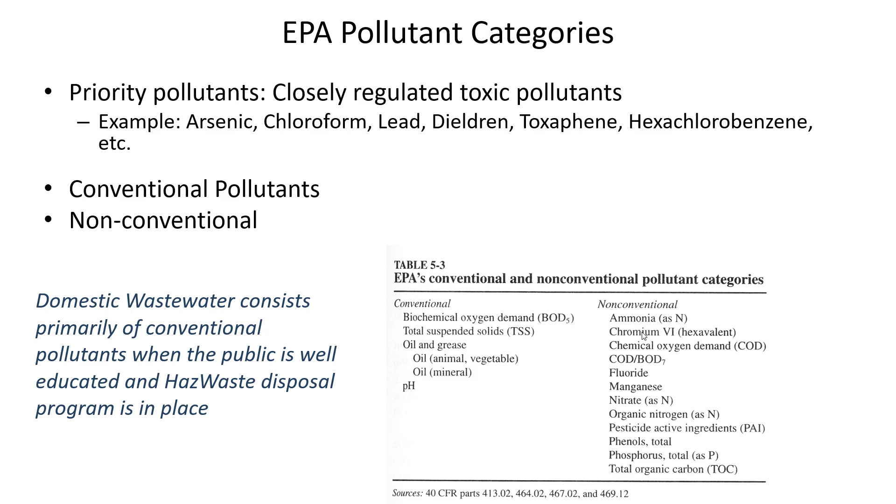And then non-conventional pollutants can be adjusted in wastewater treatment, but it's kind of a rare thing when we're focusing specifically on the removal of these. The exception being nutrients. Nutrients are becoming more commonly removed by wastewater treatment plants, but things like fluoride wouldn't typically be addressed at a wastewater treatment plant. Things like chromium would be very difficult to remove at a wastewater treatment plant. But there's a differentiation between what's considered conventional pollutants and non-conventional pollutants.

So regulations are just a really important tool in preventing those toxic pollutants from coming in and harming our bacteria in the treatment plant, and then getting through the treatment plant and harming the aquatic species that live in waters downstream. And also, we consume the river water, and so if dieldrin or chromium gets into the Ohio River, then that's going to affect the next community downstream.

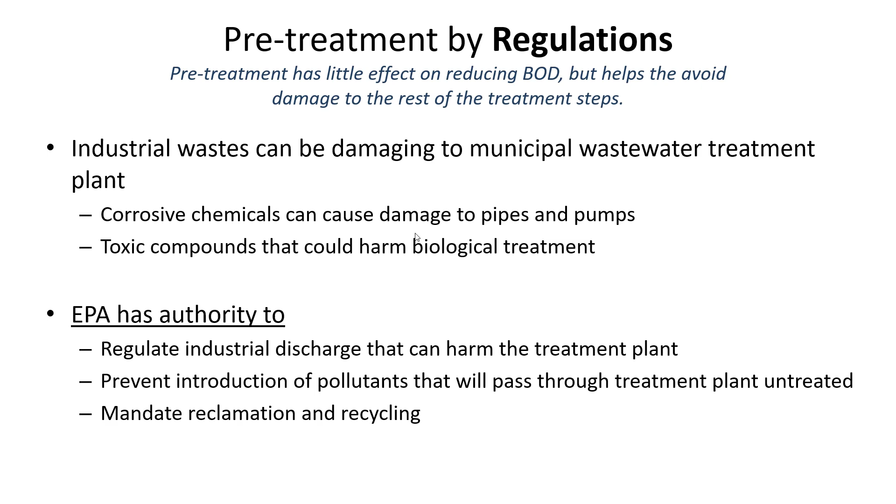So the corrosive chemicals are bad for the environment. They're often bad for the materials in the treatment plant. They can be corrosive to pipes. They can cause damage to pumps, and so we just prefer to get them out of there. And so the EPA has legislative authority that allows it to regulate industrial discharges that are thought to be harmful. And rather than regulating them one by one, and having an ever-growing list of things that you're not allowed to put into a treatment plant, they generally regulate them by categories instead.

And so here's a list of categories of things which are limited in industrial discharges. Both gasoline and diesel fuel can't be discharged to a sanitary sewer because they are capable of causing a fire or an explosion. But that would also extend to things like HMX, which is an explosive, or TNT. There isn't a long list of things that would cause fire or explosion. It's just sort of taken as a given that if you're in the business of producing those chemicals, you'd be aware of the risk of putting it into a sewer.

And so this is just a list of things which, because of the effect, would be prevented from discharge to a collection system. So if you look at some of these things, obviously solid or viscous pollutants that would obstruct flow. So even though gelatin wouldn't necessarily be toxic, it wouldn't be dangerous from a human health standpoint, or even from the standpoint of interfering with the treatment plant necessarily, a heavy gelatin or just flour put into the sewer could congeal, could block the flow, and could limit the capacity of the pipes.

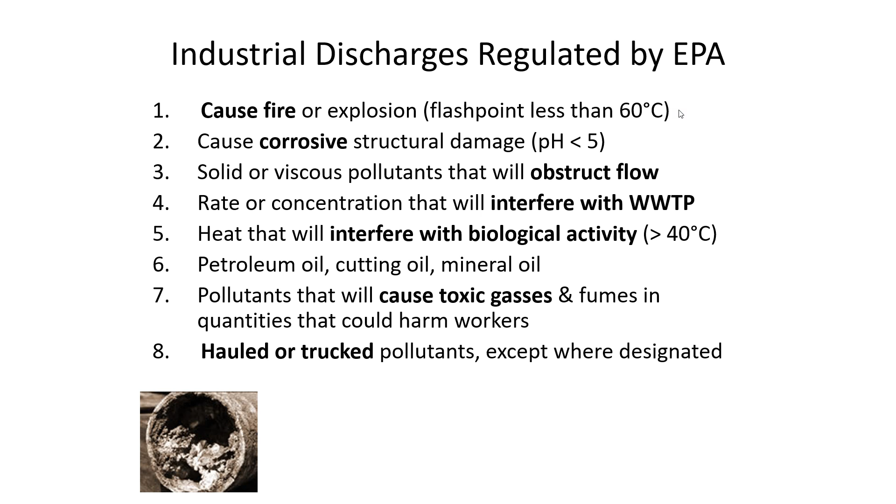And so that's the sort of thinking behind each one of these rows: there is some negative side effect that we're trying to prevent by limiting discharges, and that's why the EPA regulates them. So it's partly about putting laws in place and working with big-time polluters and likely culprits for industrial discharges, but it's also about public awareness. And there's a growing sense that just making people aware of the fact that stormwater and wastewater go to the river is going to help people be more careful about the sorts of things that they pour down the drain.

So pre-treatment is not actually treatment. It's just policies and educational programs that try and bring awareness to the need to avoid putting things down the drain.

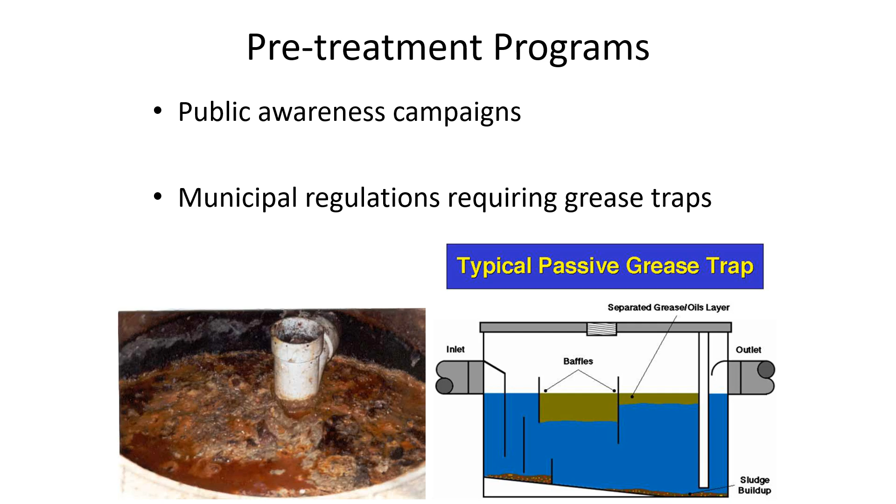And so they'll take grease, filter it, and then they will sometimes have to go through a chemical reaction to precipitate out some of the heavy chains that would cause the liquid to be too solid at low temperatures. There are a handful of cars that have been modified to run directly on vegetable oil without any further treatment. They have to heat up the fuel before it goes to the engine.

But grease is a resource. In fact, most of our wastes have in some way the capability of being considered a resource. If we're able to extract the phosphorus and nitrogen from wastewater, then those could be used as fertilizers. If we're able to apply the organic material from wastewater onto the land, then that can be a fertilizer as well. The organic material can help to improve the quality of soil potentially if it's not containing heavy metals and so on.

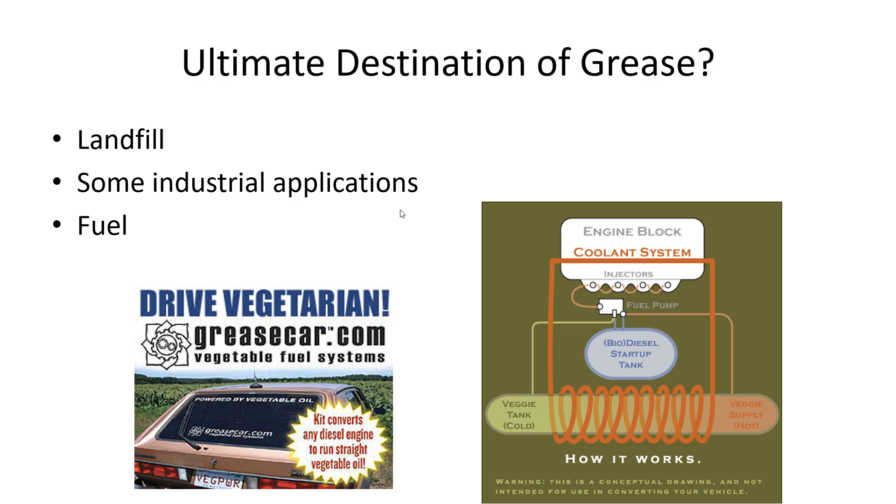So this is just another illustration of how if you are bringing awareness to the need to keep grease and oil out of the wastewater treatment plant, then maybe people are going to be more prone to recycling it and trying to find a helpful application for it.

Of course, there are some people who aren't connected to the sewer at all. They have a septic tank at home. I've got a septic tank. How many of you have septic rather than being connected? Maybe some people don't even know in a lot of cases. But if you live in a rural area, chances are good that you've got a septic tank rather than being connected to a pipe network, because it's not economically viable sometimes to put in a pipe when houses are really spaced far apart.

And I live in a place where most of the houses in the area have 2 acres, maybe up to 30 or 40 acres in some cases. And it's expensive to put a pipe in the ground. And if they're only going to be getting $20 a month from me, then it doesn't justify the expense of a concrete pipe all the way from wherever it left off to my house. So instead, I've got a septic system.

And the way it works is, you can see here, there's both a top view and a side view. When you flush the toilet, water goes to a concrete vault that has generally 2 different sides to it. And in the first part of the vault, the purpose is to allow the solids that will settle to go to the bottom of the tank. Grease and oil will float to the top. And then you draw off the water from the middle.

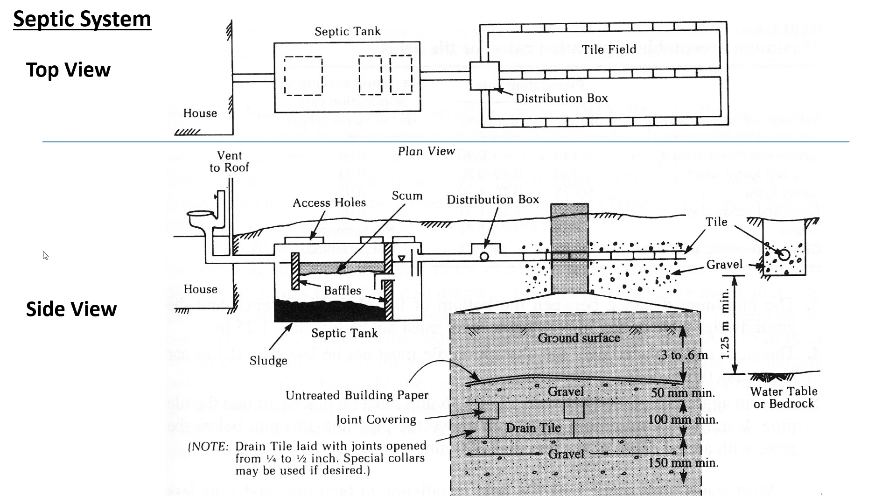There are some homes where they have only needed to remove it every 20 years, if there's good biological activity, if the bacteria growing in the septic tank break down the sludge. But of course, things like paper and grit aren't going to break down from bacteria, so that will accumulate at the bottom of the tank eventually. So this is just a little side tangent, the acknowledgement that not everybody uses a sanitary sewer, and septic tanks can be an effective way of treating waste in remote locations.

Okay, now back to the treatment plant. We talked about pre-treatment. Pre-treatment is public education campaigns and regulations to try and keep things out of the sewer. Preliminary treatment actually begins at the treatment plant itself, whereas pre-treatment is at the source. It's at the restaurant, at the industrial facility, in people's homes, just trying to prevent them putting things into the sewer that they shouldn't.

Preliminary treatment is the first step at the treatment plant itself, and it includes things like grinders, which try and break down debris so that it can pass through the treatment process without causing damage. Bar racks, which we saw when we were visiting the treatment plant here in Huntington. We saw a grit chamber, and some places may have flow equalization basins as well, and we'll talk about each one of these. These preliminary treatment operations aren't going to remove suspended solids and BOD.

It's more about conditioning the flow so that the things that we do after preliminary treatment operate more effectively. So we're removing debris that would cause problems, or we're trying to stabilize the flow rate so that it's not a big surge of flow during the day and really low flow rates at night. That's the purpose of flow equalization. Trying to remove grit that would cause damage to pumps and pipes because it's abrasive. So the purpose of preliminary treatment is conditioning the flow, but not the removal of BOD or suspended solids.

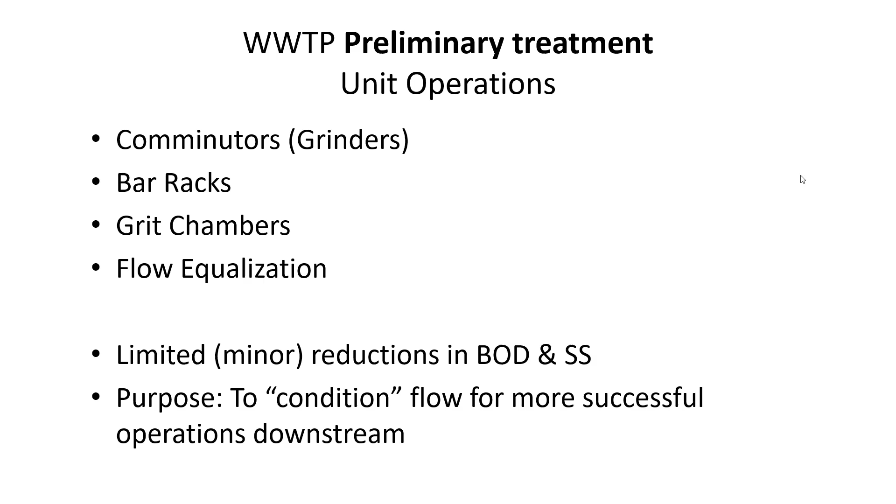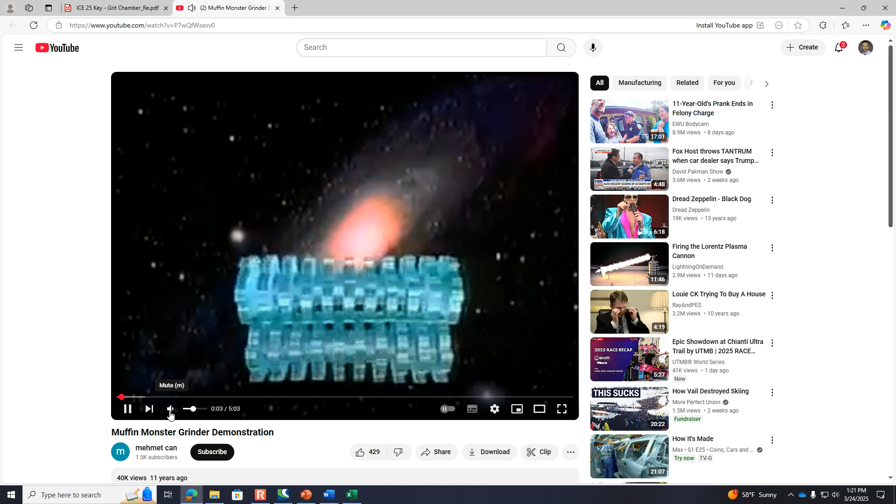All right, here's a grinder. I want to show you a video. Unfortunately, it's not the best quality video, but it will give you the idea of what a grinder does. All right, it's called the Muffin Monster. Kind of a weird name, but I'll pause this. That is to grind stuff up that otherwise would cause a clogged pipe, or maybe would damage a pump.

So when we were visiting the treatment plant, there was a shoe insole floating around in one of the aeration basins, and if they had run that through a grinder, then it presumably would be able to settle or float more easily. If something is more dense than water, then it would sink, and if it's less dense than water, it's going to float. But the scrapers in the clarifiers would be able to move the material more easily the smaller the debris is. And so that's the purpose of a grinder.

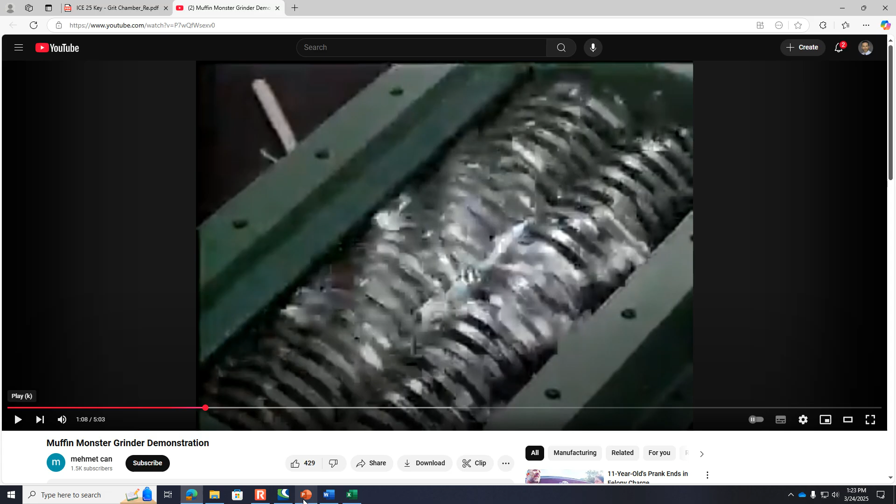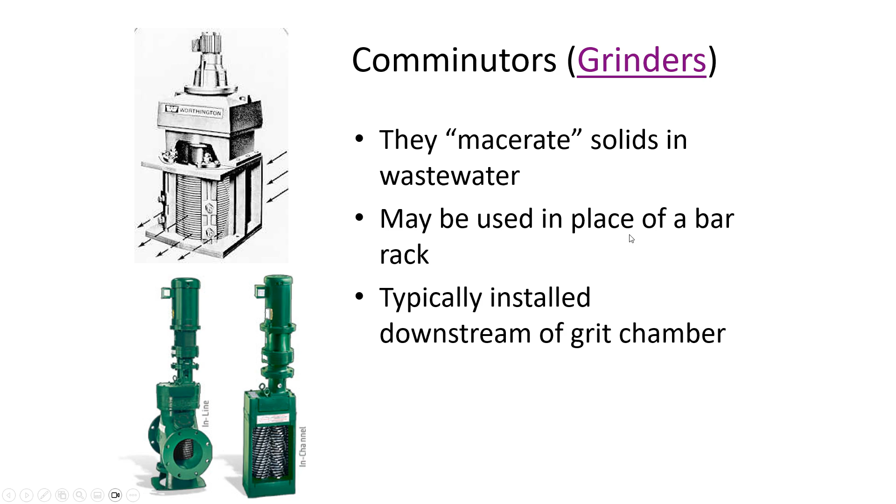Sometimes those are also called comminutors, and oftentimes those would be installed downstream of a grit chamber. Sometimes they're used instead of having a bar rack. Sometimes they'll have both a bar rack and a grinder, but now you know what a grinder is. We saw that there was a bar rack, but we didn't actually see how it was operating when we visited the treatment plant. So let me show you an illustration of that.

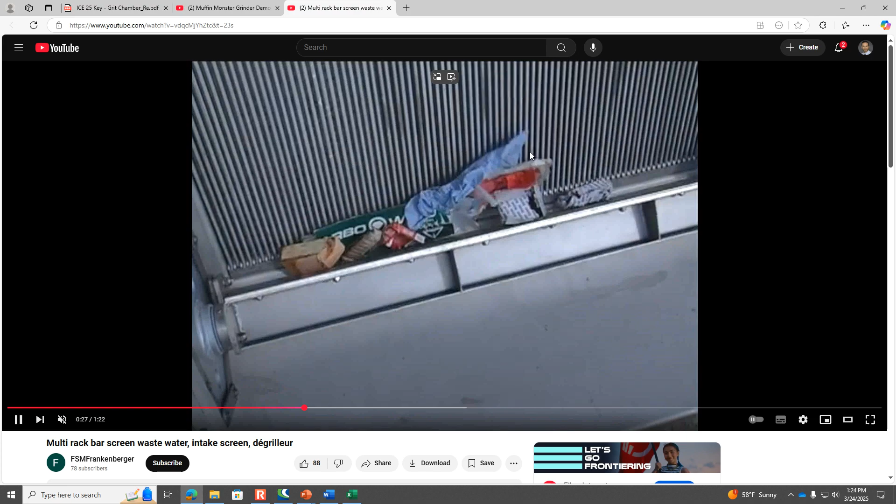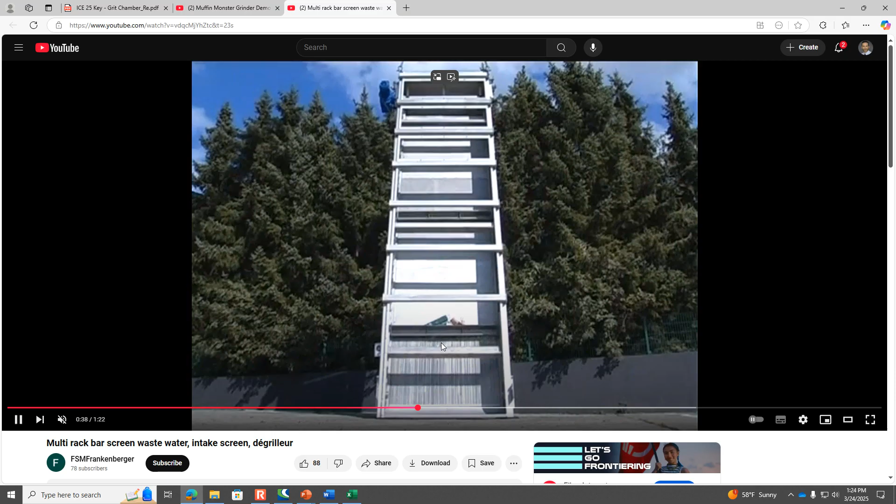Okay, so you can see that water would be flowing through this screen, and it's going to have garbage in it, but there is kind of like a squeegee that pushes the debris up over the screens, and then at the top is an opening where the debris would just fall through a chute and go to a dumpster.

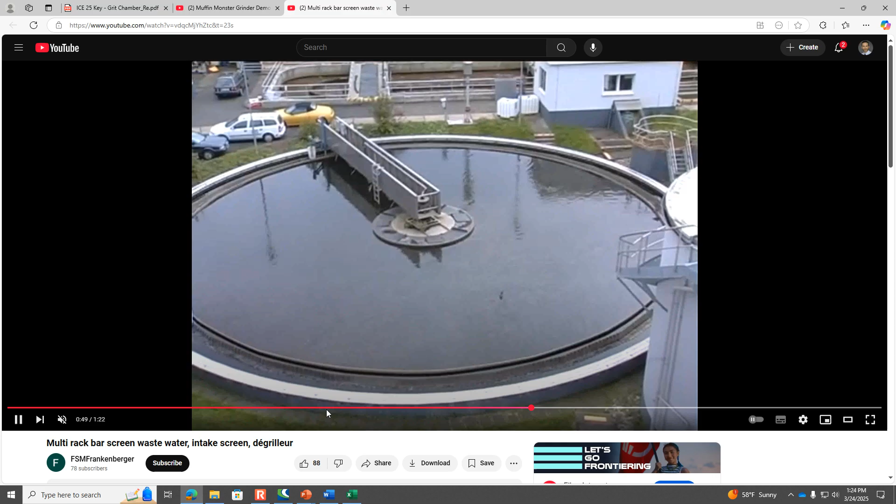So if you didn't have that system to occasionally clean the screen, then it's going to become clogged with the debris, and water couldn't flow through it effectively anymore. So it looks like this is probably a 1/4 inch, which is what they're going to be putting in at the Huntington treatment plant. They've got a 1-inch screen, but they're switching it to a 1/4 inch. So that's going to get out some of these things that, it's just trash that's going to interfere with the flow downstream if we leave it in.

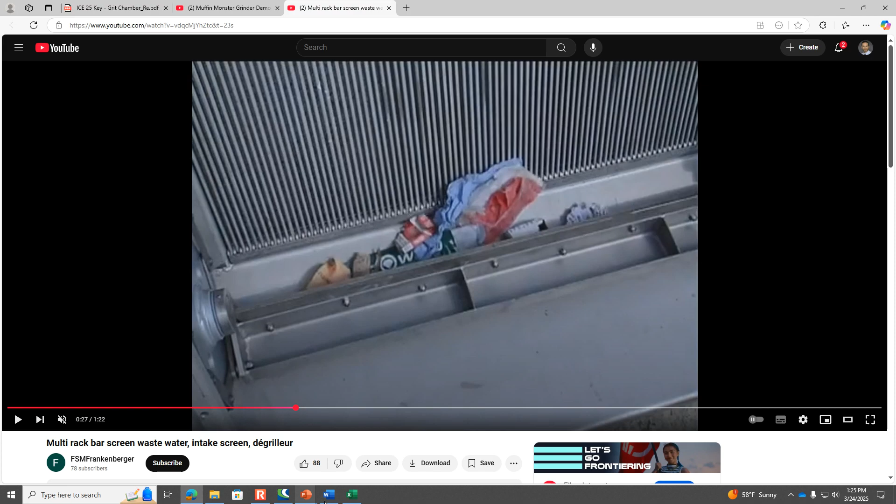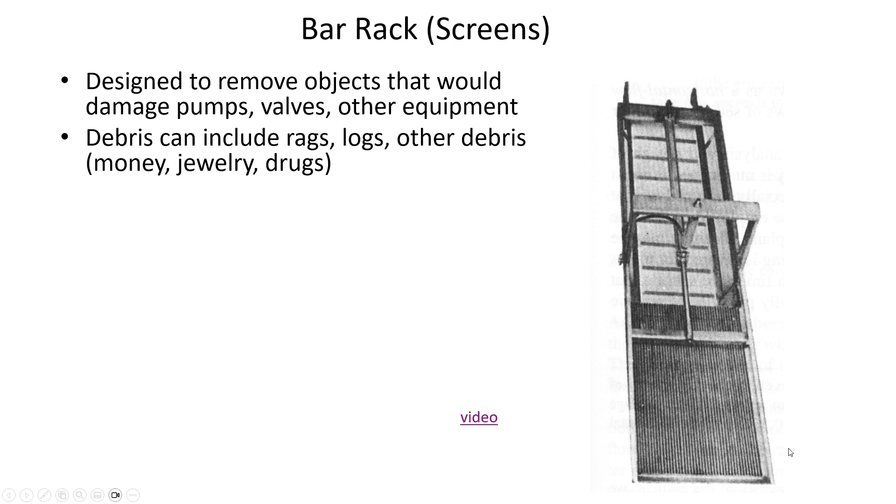All right. So the materials that are gathered have to be landfilled, and as much as possible, you'd like to have very little organic material accumulated. So you want the human waste to go through, but you want the solid materials to not go through. And so that's why they can't get too fine in the screen, because then eventually the solid waste would accumulate on the bar rack, and we don't want to send that to the landfill.

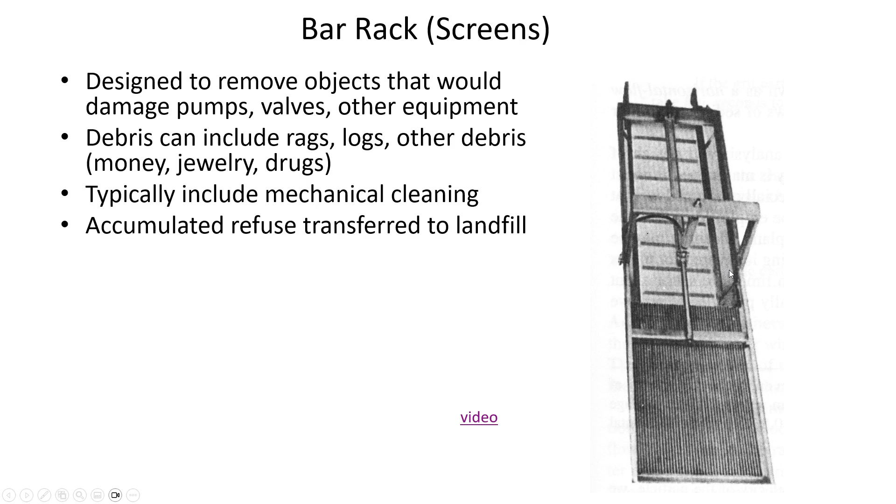So there's kind of like a Goldilocks zone of having a mesh that's fine enough that it's going to trap the debris that would cause damage to the treatment plant, but it's not so fine that it's trapping solid waste.

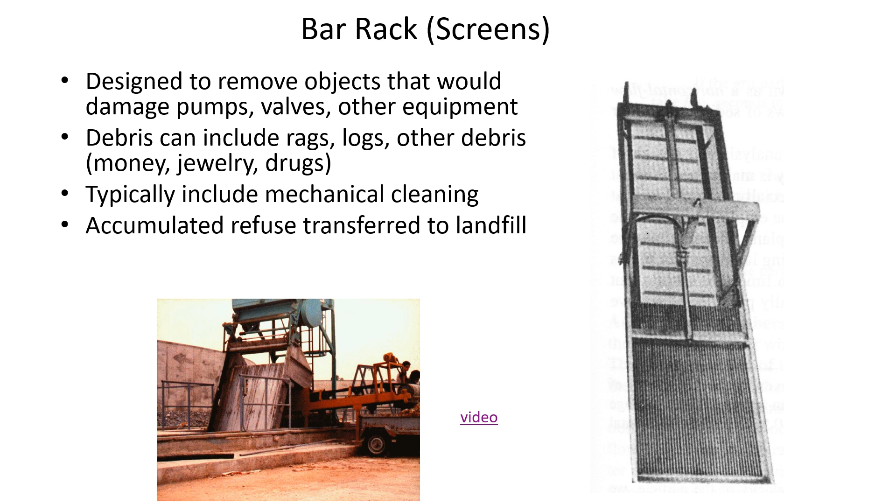Okay, so grit removal is an important step of pre-treatment, because the sand and gravel and broken glass, if it remains in the water, then it's going to ruin the pumps very quickly. The impellers that are moving very fast are sensitive to the abrasive grit that can be present in wastewater, and especially when we have a combined sewer in Huntington, you're getting a lot of stuff off of the road.

So you may be wondering, where is the grit coming from? Are people flushing sand down the toilet? And it's not that. It's that the material like asphalt from the road is breaking down over time, and people put sand on the road during icy conditions, and when that melts and gets into a combined sewer, then it flows along with the wastewater towards the treatment plant.

So the two main ways that grit is removed is either with an aerated grit chamber, which is what they have in Huntington, where they're using an air diffuser to cause kind of a helical trajectory of the water as it goes through. So you can see that the rising air bubbles are going to cause a circular motion of the water.

Let me show you. Oh, there's the statistic of there's between 30 and 90 cubic meters of grit per million cubic meters of wastewater. So it's a tiny fraction of the overall volume of wastewater, but has the potential to cause a lot of damage all the same.

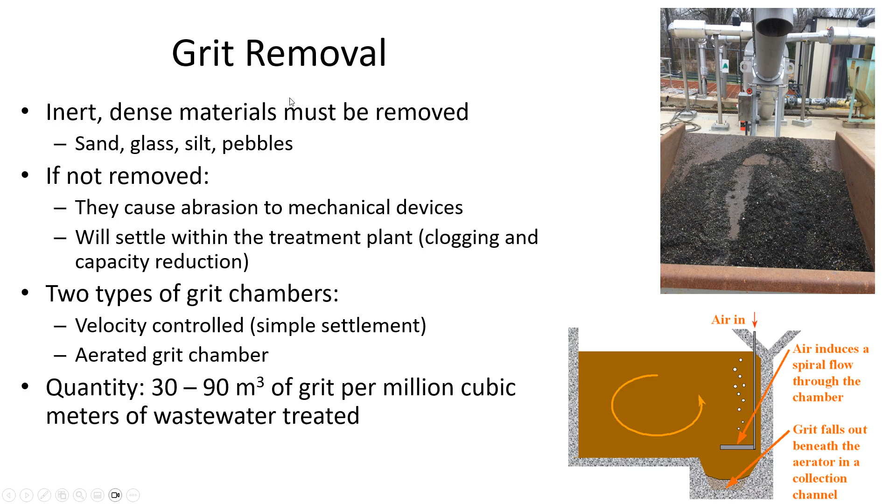So this is showing with a little bit more detail the trajectory of the water. It's both circulating vertically and also horizontally as the water goes through there. An advantage of that is that it causes the grit particles to reach against the side of the wall and then settle down the wall and to the center trough.

And by keeping the water aerated, that's a good way of preventing organic waste from settling at the bottom of the grit chamber, because later on we're going to have a primary clarifier as a part of the primary treatment where we do want solid waste to settle. But we don't want the solid waste and the grit to settle in the same place because we're doing different things with them.

The grit is going to be landfilled along with the stuff that comes out of the bar screen. The grit, we're going to maybe just rinse it off but then send it to a landfill in a truck. But the solid waste that settles in the primary clarifier, we're going to either digest it or recirculate it or dry it before it's sent to the landfill.

So we need to collect the grit separately from organic waste, and the aerated grit chamber is really good about that. It provides enough movement in the chamber where the grit is relatively dense. It has a density of 2.5, 2.6 grams per cubic centimeter, and so it'll settle a lot faster than solid waste will, which has a density which is closer to 1 gram per cubic centimeter.

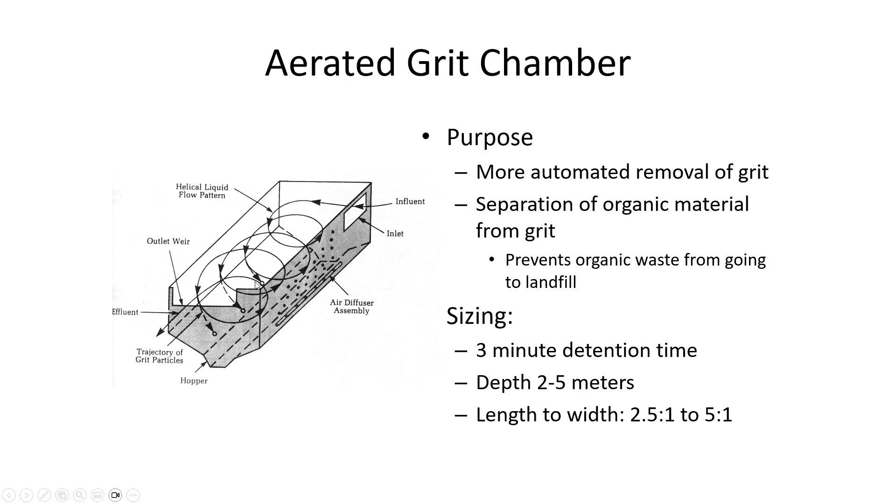The other type of grit chamber is a horizontal flow grit chamber where it's not aerated. It's not trying to push the grit around with aeration; it's really just a wide section in the pipe where the flow velocity settles down, and it settles low enough that the grit can settle, but hopefully not so low that the organic material will settle.

And then they'd have a mechanical assembly to sweep the bottom of the grit chamber and then remove the accumulated grit with something like a screw conveyor, which is a positive displacement pump. And either way, whether we're talking about an aerated grit chamber or a velocity controlled grit chamber, here's the formula that describes the settling velocity of grit particles.

It's Stokes' law. Let me give you an in-class exercise. Because we're having to cover a little bit more ground than usual to make up for the time that we spent at the treatment plant, we're going to go through 2 in-class exercises today. And I just wanted to cut straight to the chase and give you the solution.

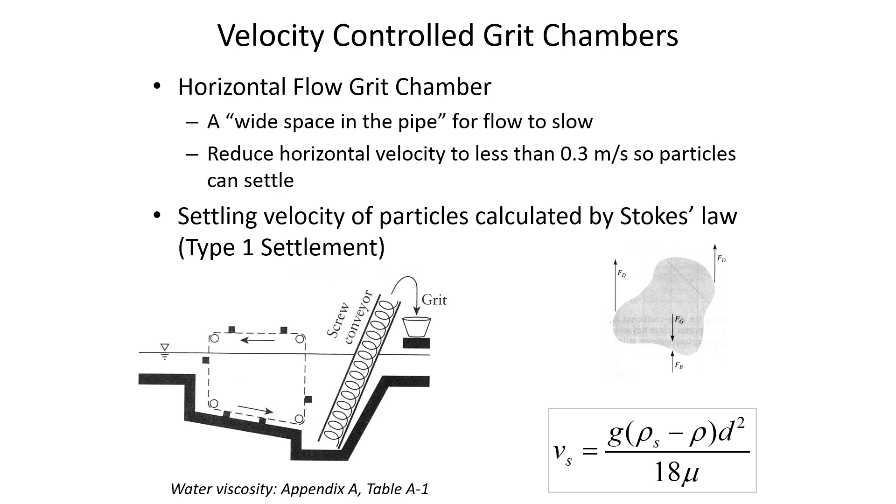So, Stokes' law, I think we've talked about it briefly before, assumes a spherical shape for the particles that are settling. And so in the sizing of a grit chamber, you'd need to know the flow rate of the wastewater, because if you're sending wastewater through a grit chamber of a certain size, that's going to determine how long it spends in the grit chamber and what the horizontal velocity is through the grit chamber. Because we'll have a particle that's settling down, and we want to make sure that we provide enough time in the grit chamber for the particle to settle downward.

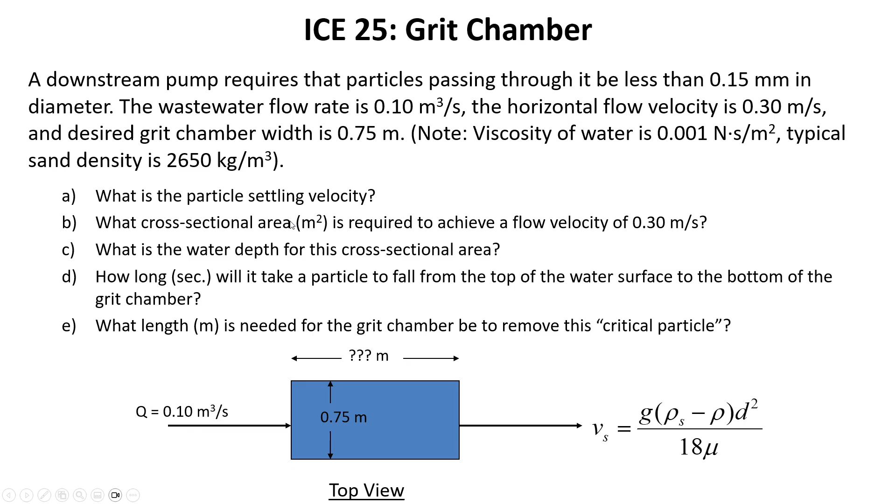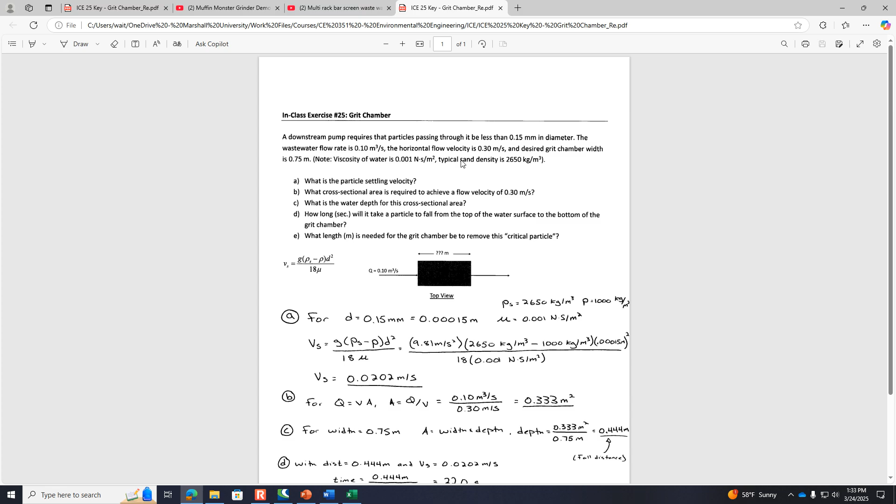And so we would need to know the intended width of the grit chamber, the flow rate that the water is going through, and therefore the horizontal flow velocity, and then a little bit about the particle characteristics, like the viscosity of the water and the density of the particle. So in the handout that I've given you, let me just pull up the solution so I can bring it up on the screen. It takes you through the process of, first of all, calculating the settling velocity of a certain size grit particle.

So let's say that we know our pump won't be damaged by particles that are smaller than 0.15 millimeters, but everything bigger than that does need to be removed. So that's our critical particle diameter that we're using for the grit. You can see I've converted that into meters. And then we can find the settling velocity for a particle that is sand and has the typical density of sand, 2650 kilograms per cubic meter.

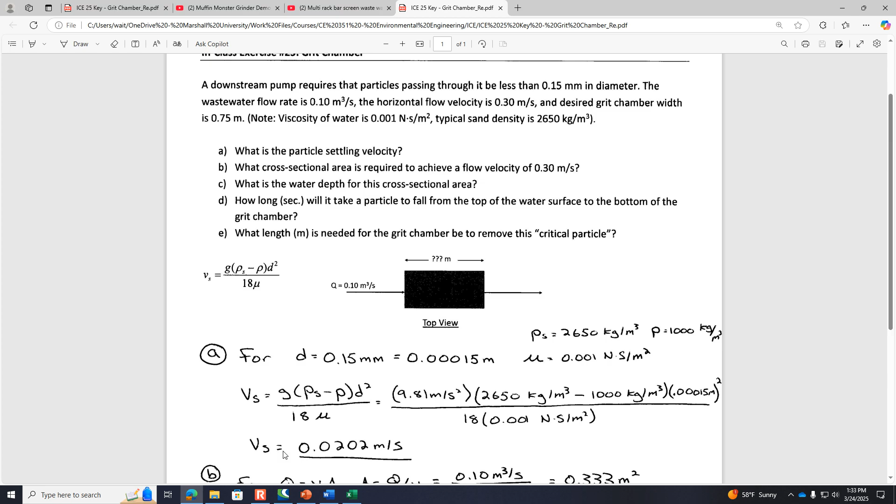And so the difference in the sand density and the water density is one of the driving factors in how quickly it settles, as is the diameter of the particle and the viscosity of the fluid. So this particular particle is going to settle downward at a rate of 0.02 meters per second. So that's how fast it falls down. And so what we do now is find out how tall the grit chamber is going to be.

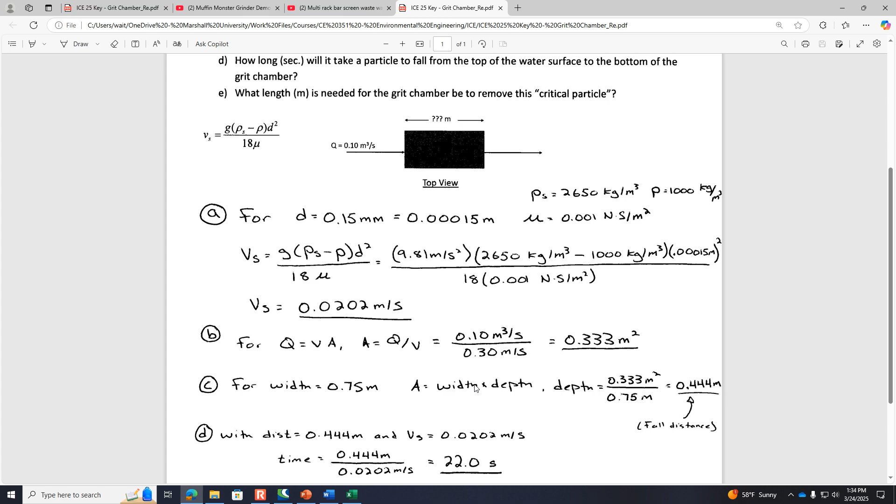If we know it's going to be 0.75 meters wide and we're looking for a flow velocity of 0.3 meters per second, then we use the continuity relationship, flow rate is velocity times area, to find out what cross-sectional area and therefore what fall distance, how deep the water is going to be in the grit chamber. So if it's falling a distance of 0.444 meters and it's falling downward at a velocity of 0.0202 meters per second, then it's going to fall for 22 seconds.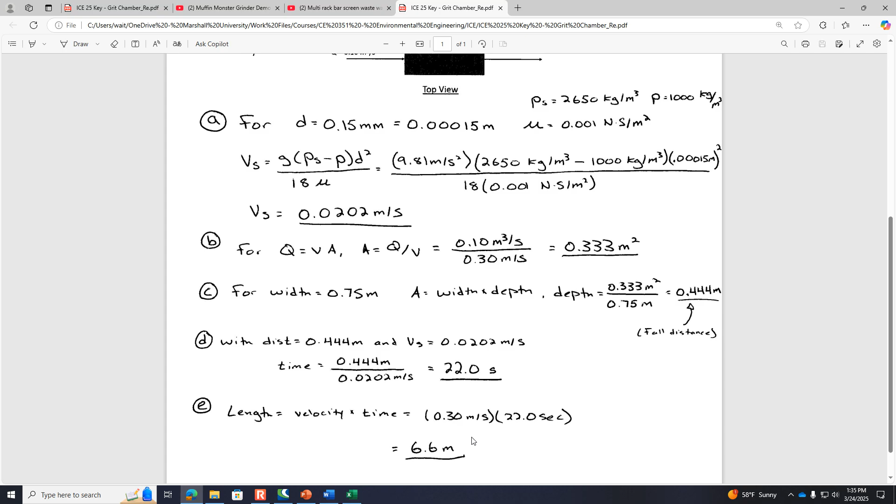And then if we know that it's proceeding through the settling chamber at a rate of 0.3 meters per second, that tells us how long it would need to be in order to capture that critical particle. Assuming the worst case scenario, that it starts at the very top of the grit chamber and has to settle down through the entire depth of the grit chamber column, then 6.6 meters would be sufficiently long to capture that critical particle.

So any particle that's bigger than that is going to settle faster. And some of the particles won't start at the very top of the grit chamber, so they don't have as far to fall. So this is similar to some of the settling calculations that we did in water treatment as well. Stokes' law is what we can use. And so that's how to do it for a grit chamber. Does anybody have any questions before we move on from this illustration?

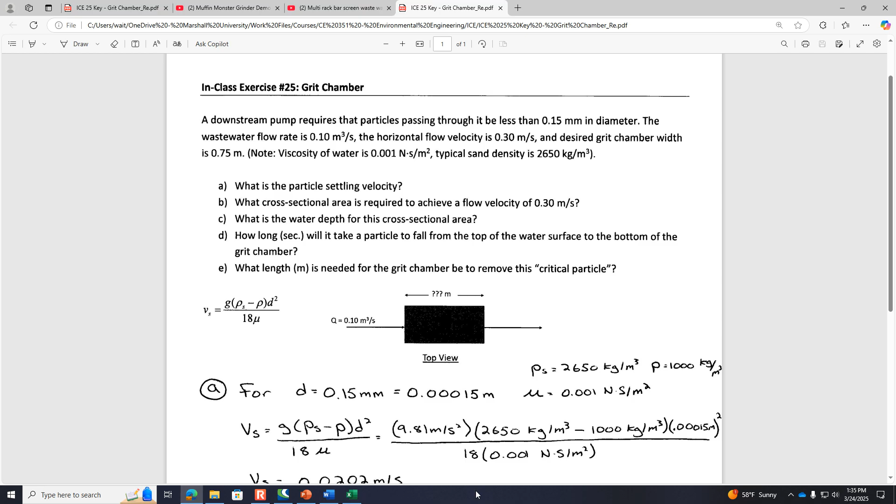Okay, so flow equalization is the other thing we're going to talk about today, and it's included on the homework, by the way. I think there's a grit chamber problem on the homework, and so now you've got a handout that kind of illustrates those calculations. I'm also going to give you a handout that illustrates how to do flow equalization basin calculations. Now, not every facility has a flow equalization basin.

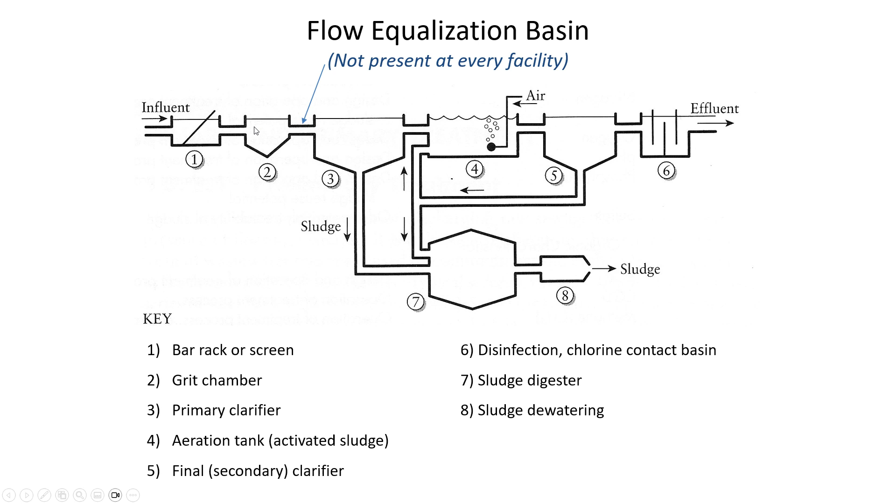So if we put in a tank to try and smooth out those daily variations, then that's going to improve the performance of the treatment plant. It's going to improve the biological removal of BOD because the bugs don't want to be starved at night and then overfed during the middle of the day. Microorganisms remove BOD more effectively if they're fed at a constant rate of BOD. So putting in a flow equalization tank kind of acts as a shock absorber in a sense. And it will help to cushion and smooth out the peak flow and the low flow.

So to do a flow equalization calculation, what you'd first of all need to know is, over time, what does it look like in terms of the flow rate in and the concentration of the waste over time? And you may be wondering, why would the BOD change during the day? And that's because what flow does make it to the treatment plant at night is largely related to infiltration and inflow, which we've talked about before. That could be like groundwater getting into the pipe through a crack in the collection network. And groundwater doesn't have BOD. Water from people's roof drains or foundation drains doesn't have BOD.

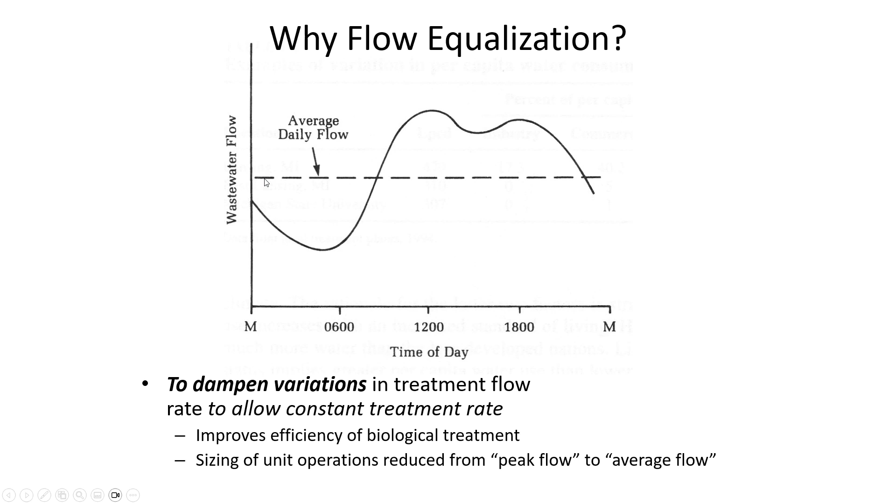So what we need to do is analyze when is it during the day that we would see the tank begin to fill. Because at night, if you think about it, there's a big tank full of waste that we stored during the previous day. So the extra wastewater that's coming in over and above the average daily flow is collected in the afternoon and the evening. And then at night, during the low flow rate times, we're drawing the water out of the storage tank, and that's what we're going to be treating in the middle of the night. We're treating the water that had been stored earlier in the day.

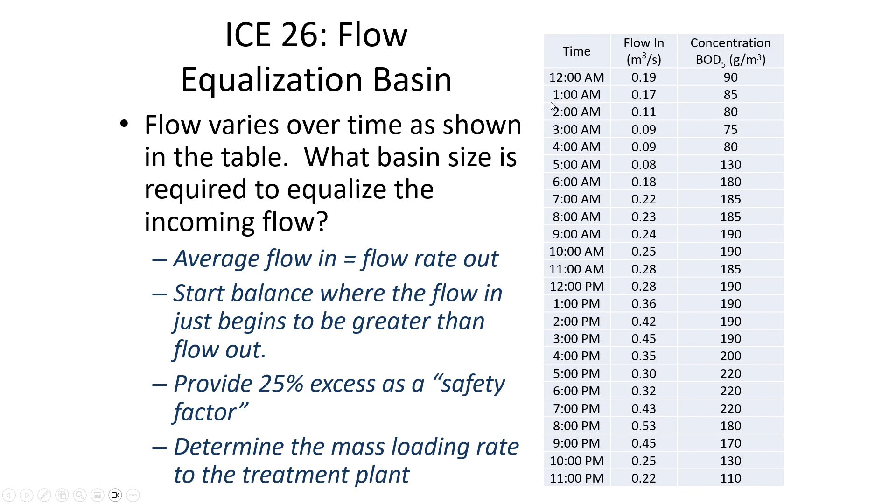So the first question we need to ask is, when during the day is the incoming flow rate greater than the average daily flow? So this is best done on a spreadsheet. I'm going to give you the handout here, and then we're going to open up a spreadsheet file that illustrates how to do the calculations. And on the back side of here is the solution.

Okay, so you've got a homework assignment that's pretty similar to this. And so you'll be given time, flow rate, and concentration. By the way, did everybody get a copy? Okay, good. So just translate that, put in the same data, the time, flow rate, and concentration into Excel.

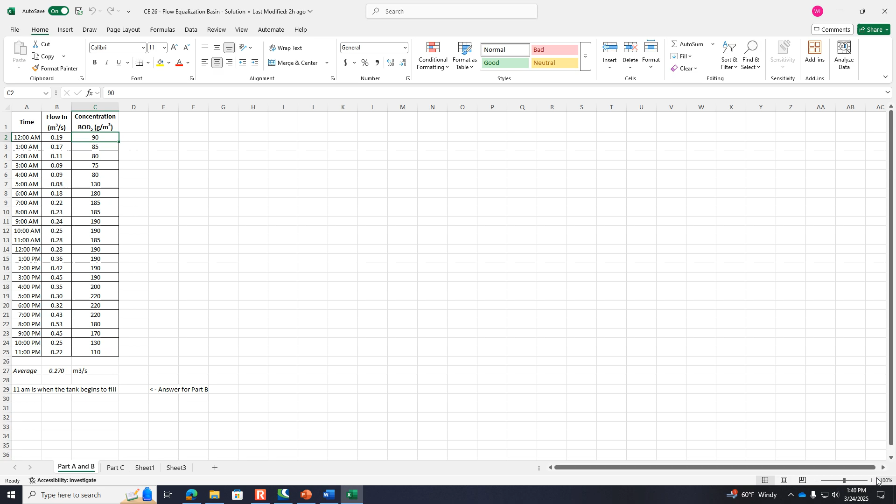And the flow rate in varies over time, but the flow rate that you're taking out of the tank is constant. And for it to work out, for the daily cycle to meet, you want the total volume in to be equal to the total volume that you take out in a 24-hour cycle. So we're just wanting to calculate what is the average flow rate in during the day, and then that's the same flow rate that we're drawing out constantly.

And so you can see here I've just typed in the flow rate in and the concentration in. So I took the average of the 24 hours worth of data, and so the flow rate out is going to be 0.2704 cubic meters per second. So that's the answer to part A of this one, where it's asking, determine the average daily flow. This is the flow out from the basin.

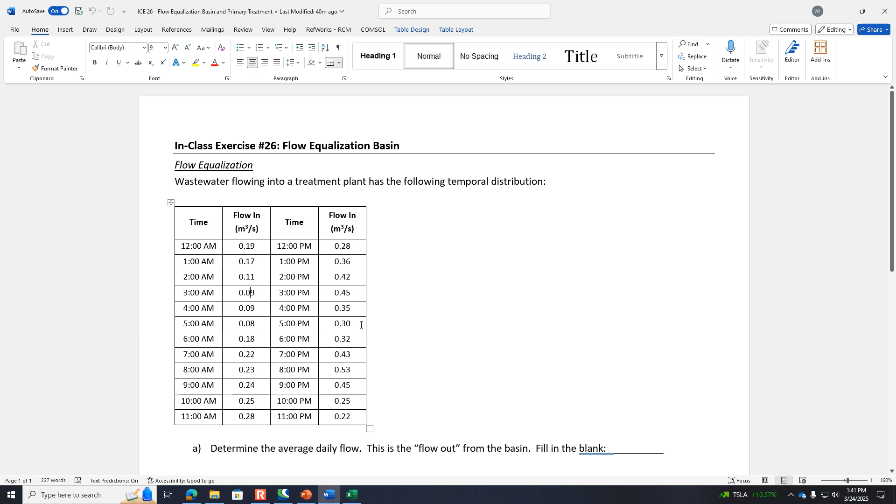The average daily flow is just the average of each of these different hours. And the data is provided in 1 hour increments, so we can do the simple average to find the average daily flow. Okay, so now if the average daily flow is 0.27, now we need to find out when in the morning is the first time that the basin will begin to fill.

So remember, through the night, the flow rate coming in is less than the average, and so we are using the stored waste from the previous day to feed the treatment plant overnight. And then there's a certain hour of the day when the flow rate exceeds the average. And so through the night, you can see the flow rate in is less than the average, still less than the average. And now at 11 a.m., the flow in is 0.28 and the flow out is 0.27.

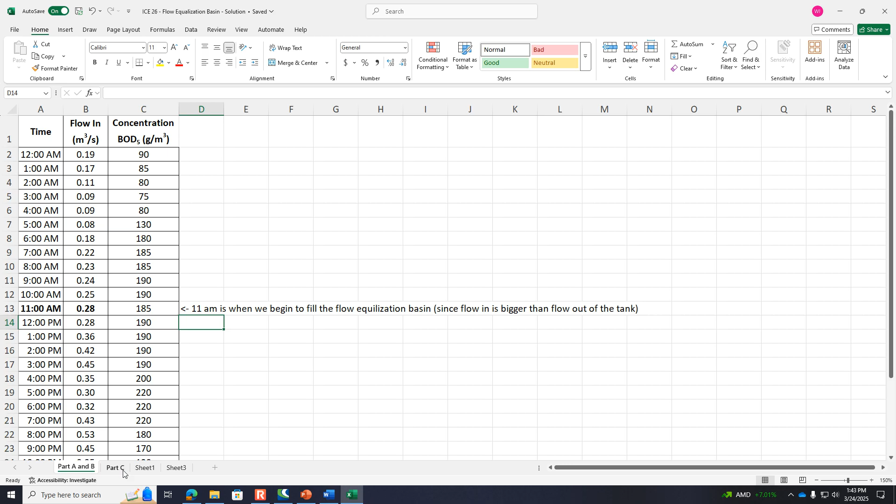So this 11 a.m. represents the time when we've used up all of the water that had been stored in the previous cycle, and we're just starting to fill the tank now. So 11 a.m. is when we begin to fill the flow equalization basin, since flow in is bigger than flow out of the tank. So that's at 11 a.m. So I'm going to reorganize this data.

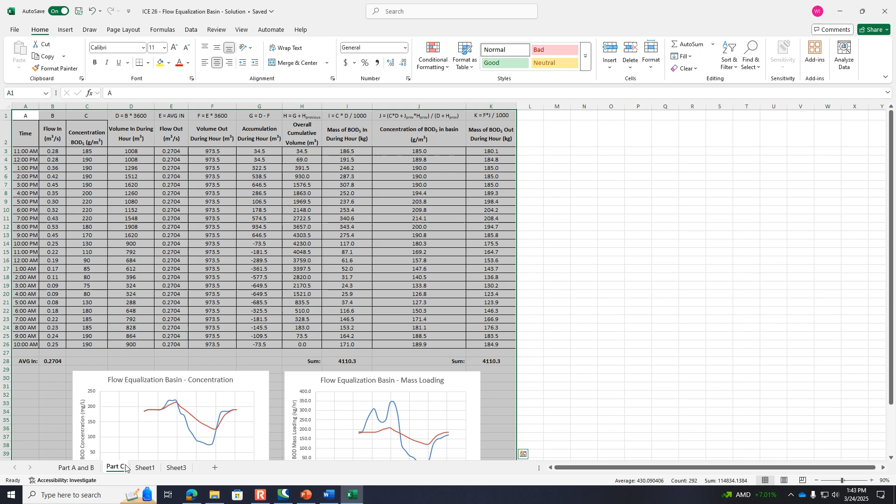This says part C, reorganize the list so this time that you identified is the top of the list and then it continues consecutively. So here on the back side of the paper is what you're seeing, the result of this, where we've got the 11 a.m. at the top of the list. So here's the flow rate in and the concentration. So this is just all given data. Column A, B, and C is just given data, but I've reorganized it so that the daily cycle starts at 11 a.m.

So it goes 11 a.m., noon, 1, and so on and so forth through the full daily cycle, but then I don't repeat 11 a.m. at the bottom of the list. The last hour is the 10 o'clock hour. So 10 a.m. is at the bottom of the list, and if we counted this, it's 24 hours. So the count, there's 24 hours of data. And the average is the same. The average is still 0.2704. That's the average daily flow, and that's what we assume the flow rate out of the tank is.

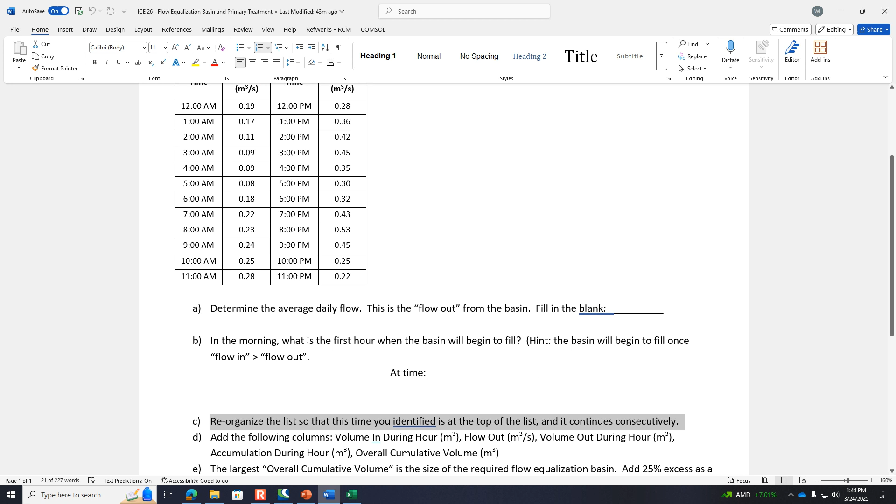Okay, so this next process is I've added a few column titles here, and we're going to go through the process of trying to figure out how big does the storage tank need to be, and then also how does the loading of BOD change over time. So column D is the flow rate in multiplied by 3,600 seconds per hour. So column D, this is called volume in during the hour. If this is the flow rate in, volume in is just flow rate times time.

So 3,600 seconds in an hour, so we've multiplied, in this case, 0.28 cubic meters per second times 3,600 seconds, and you get the increment during the 1 hour period between 11 a.m. and 12 p.m., how much flow in there was. And we do that for every row, for every hour of the day. So once you type the formula in a single time, obviously you don't have to type that formula over and over. You can just drag it down and it'll apply the formula to each row. Okay, the flow rate out, you're going to just assume that the flow rate out is the average daily flow in.

So here, I found the average is 0.27042. My recommendation is rather than keying that in, just reference down here where you calculated the average daily flow. So you can see that I've got it anchored here. I'm referring to the cell location where the average daily flow was. So that's the flow rate out in terms of Q. And then the volume out during the hourly increment is the flow rate times 3,600 seconds.

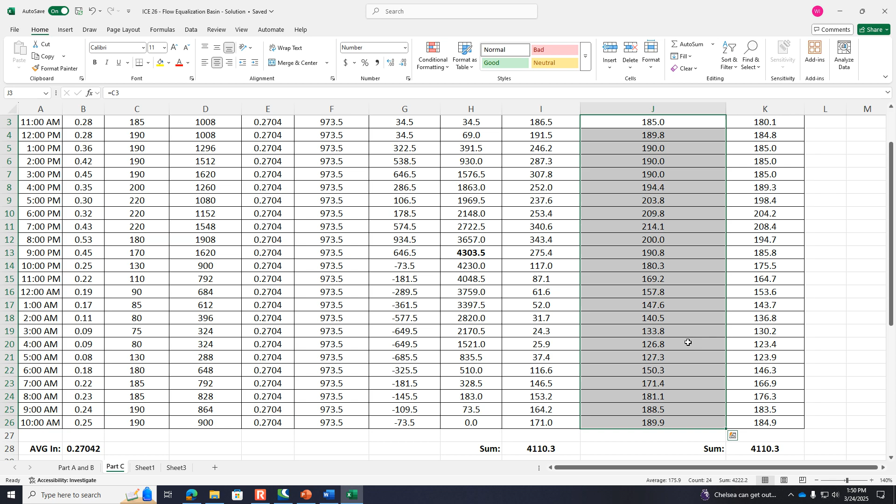So if you look, the BOD that's coming in varies between 75 and what's the most we get up to, 220? If we have this flow equalization basin, it's acting as kind of a shock absorber. We don't have it go as low as 75. The low only gets down to like 125 approximately, and it doesn't get quite as high either. So it smooths things out. This is the concentration, and then here's the mass flow out of BOD given an hour.

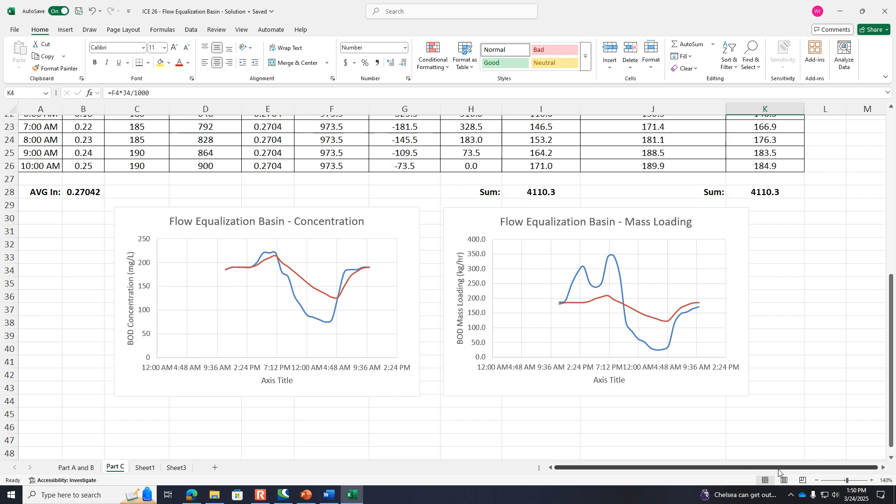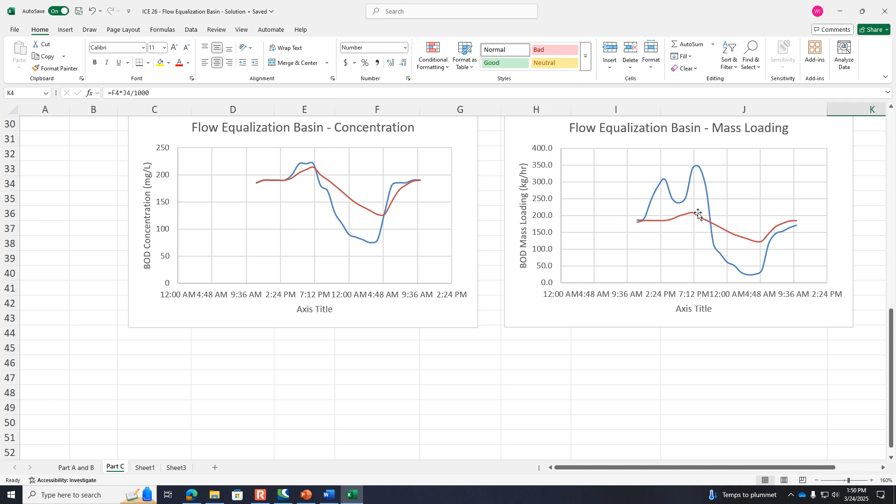So here's graphs that just show the effect of the flow equalization on how the concentration is cushioned over time and how the mass loading is cushioned over time. So you've got this spreadsheet illustration, and hopefully that'll be useful, but I recognize this column J in particular is a little bit complicated. So if you run into issues as you're working on it, feel free to stop by my office and I'll be happy to help you with your spreadsheet.